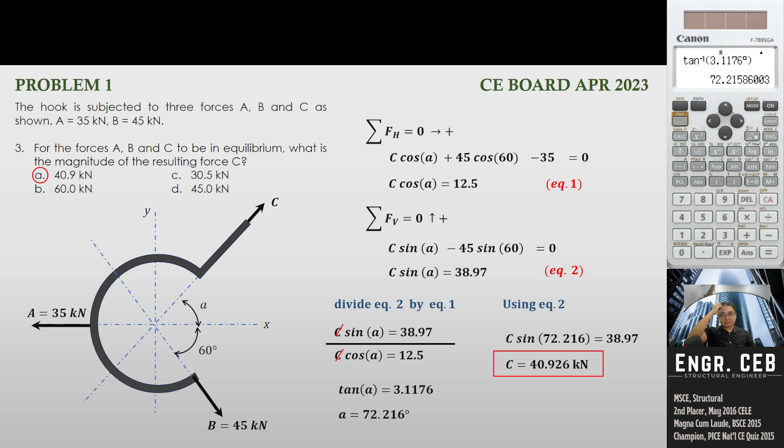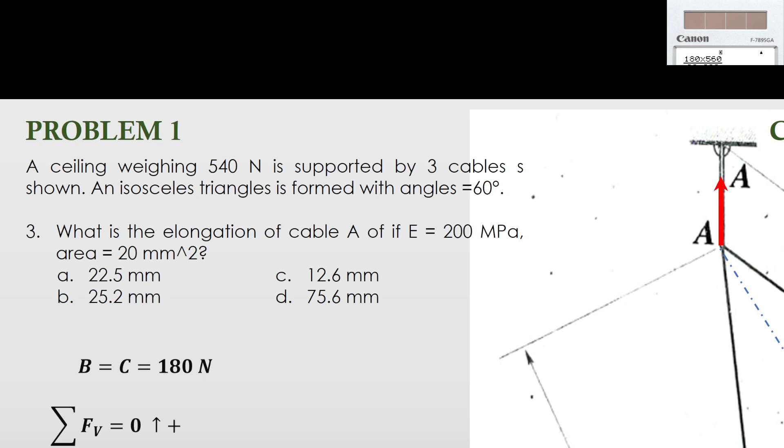And then, ang area, given siya as 20, and the modulus of elasticity is 200 megapascal, no? So substitute mo lang, we can solve that the deformation is 25.2. Tingin tayo sa calculator. 180 times 560 over 20 times 200. Okay, so that is 25.2. So that is letter B.

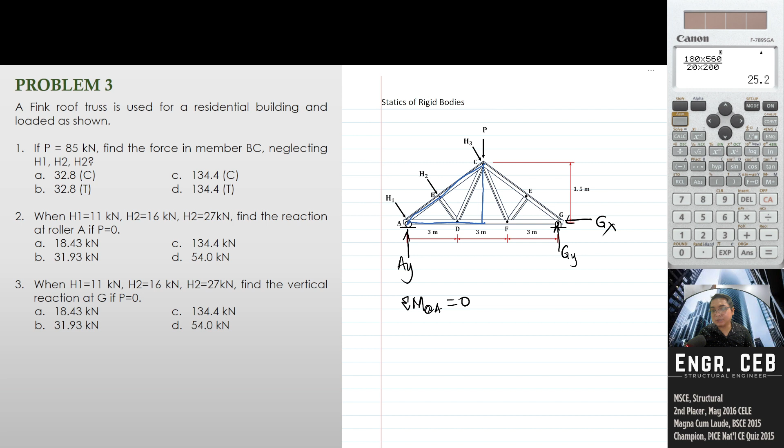Meron siyang height na 1.5. And then, merong width na 3 plus kalahati ng 3. So, 4.5. So, sa right triangle na yan, ito yung dimension niya: 1.5 by 4.5. Okay? So, to get the hypotenuse, kasi right triangle yan, we just get the square root of the sum of the squares ng sides. Let's say, tawagin natin tong side AC. So, by Pythagorean theorem, we have 4.5 squared plus 1.5 squared equals AC squared. So, therefore, mako-compute natin si AC.

And we have square root of 1.5 squared plus 4.5 squared. That is 4.74341649. Okay? Ayan. So, ito yung ating side AC. And then, kunin na rin natin si side AB, no? So, if I will draw a vertical line dito, makikita nyo na pwede natin makompute yung angle, no? Para makompute natin tong segment AB.

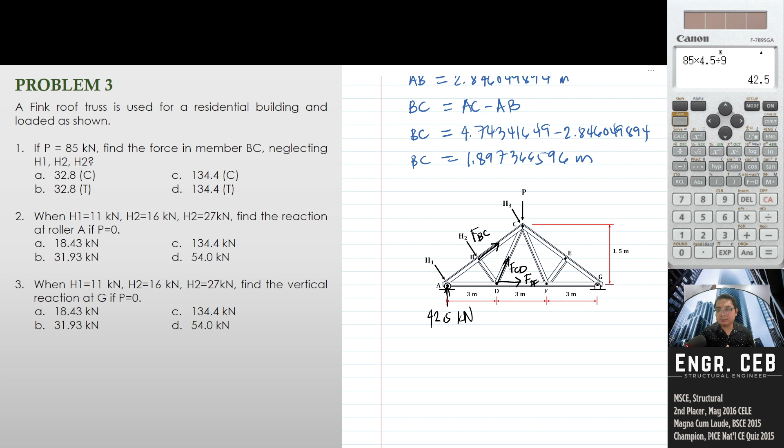So, ang titignan lang natin is itong left side, no? Yung ating free body diagram. So ito, hindi nyo na muna titignan, no? Kasi ang inanalyze natin is yung left side ng free body diagram. Okay? So, with that, pwede na natin i-solve si BC. So, to solve for BC, pwedeng mag-moment lang tayo about point D, no? Sige, so moment tayo about point D.

And then, i-resolve natin into components vertical and horizontal yung BC. So, this is FBC cosine theta, no? And then, this is FBC sine of theta. FBC cosine of theta. Okay? Sige. So, summation of moments about point D equals 0. So, ano yung mga may moment kay point D? So, let's say, positive counterclockwise yung direction natin.

So, ang may moment kay D is si FBC sin theta, no? So we have F sub BC sin theta. Anong moment arm nitong vertical component? Let's say hindi pa natin yan alam. Gawin muna natin B. Times B. Yung moment niya is clockwise, so dapat gawin natin negative.

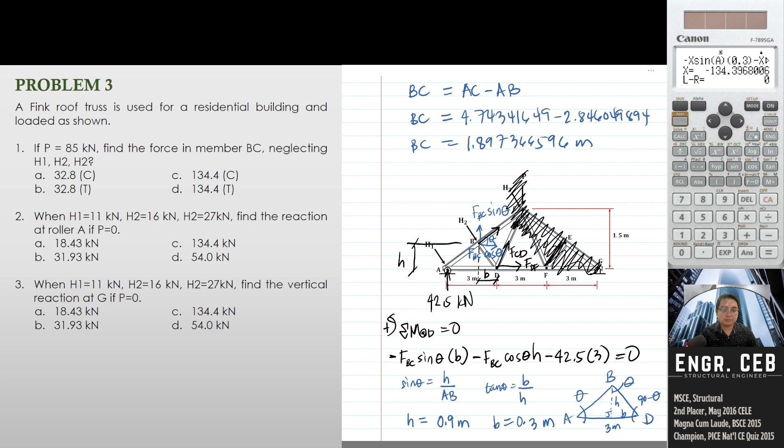So, substitute mo yan, masosolve natin si FBC, and that is F sub BC equals negative 134.3968006 kilonewton, no? Okay, nag-negative siya, ibig sabihin, baliktad yung assumption natin sa tamang sagot, no? Hindi mali yung value, pero baliktad lang ng assumption. So, meaning, instead of tension, lalagay lang natin na compression to. Okay, so yung sagot natin sa number 1 is letter C. So, letter C, 134.4.

Compression. No? Next, when H1 equals 11, H2 equals 16, and H3 is 27, find the reaction at the roller A if P equals 0. Sige. So, this time, may value naman yung mga H pero si P wala. Solve natin.

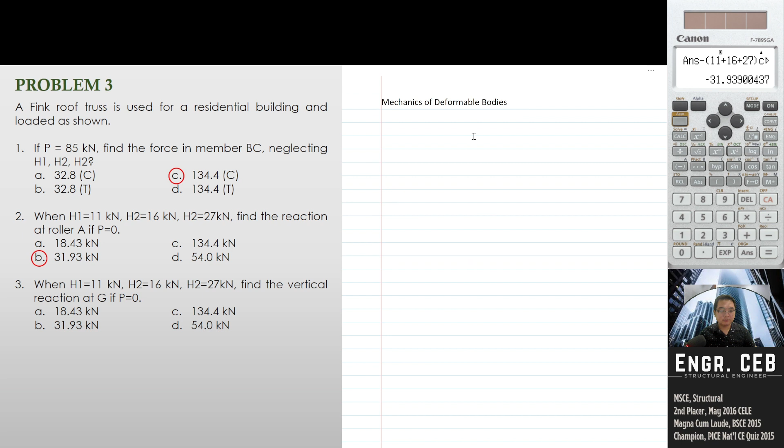Summation of forces along horizontal tayo. Summation of forces along horizontal equals 0. We have 11 plus 16 plus 27 sine of theta minus G sub x equals 0.

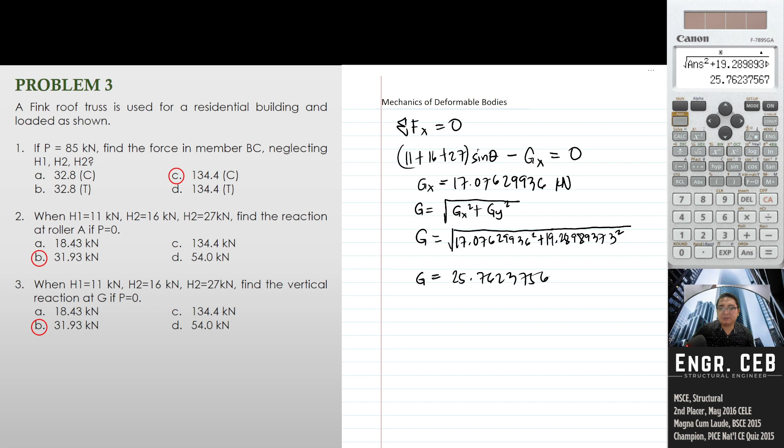19.28989373 squared. So therefore, G equals 25.76237567 kilonewton. So ito yung resultant reaction sa G, no?

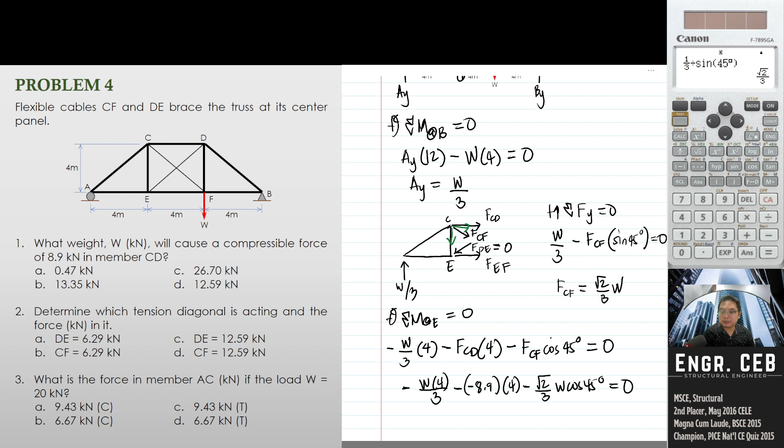So therefore, masasolve na natin si W. So ilan? Yeah, now. So that is 21.36. Ganun.

Ay, sorry. Di ko pa nalagay yung moment arm ni CF cosine 45 degrees. Sorry. CF cosine 45 degrees times 4. So, therefore, that is 13.35. So, 13.35. Okay, so that is letter B.

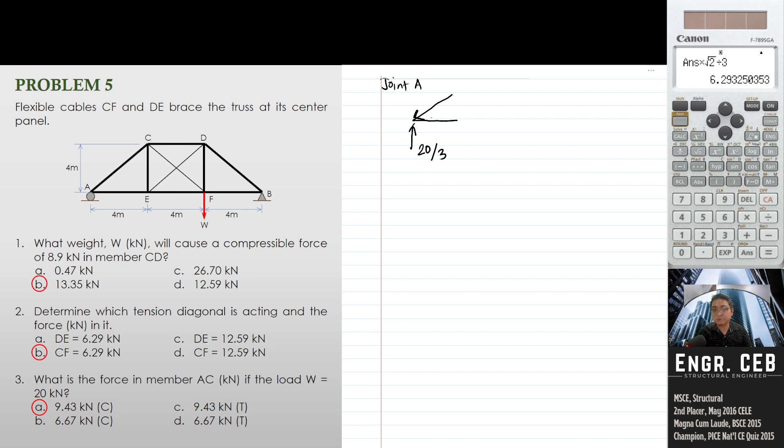Katulad dito, ang upward na force na i-resist ay 20/3 na upward. So, dapat ang maging vertical component ni AC ay downward para ma-maintain yung equilibrium. Kaya kung downward si AC, ibig sabihin, ang nade-develop sa kanya is compression kasi towards the joint ang kanyang reaction. So obviously, si AE naman dapat tension.

Pero si AC lang naman ang hinahanap. So we can sum forces along the vertical and then masosolve natin si AC. 20/3 minus vertical component ni AC, that is AC sine 45 degrees. So the force in AC is 20/3 divided by sine 45 degrees. So that is 9.43 kilonewton, and we have to note na that is in compression. So the answer is letter A for number 3.

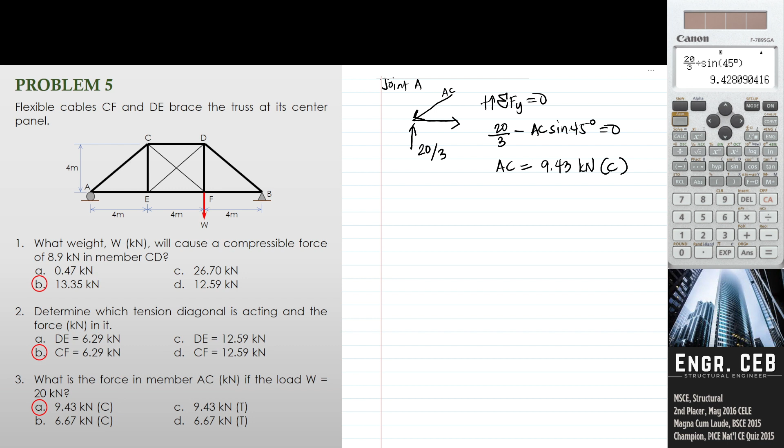So may questions ba? Wait lang ha. Break time lang ng 1 minute lang. Inom lang akong tubig.

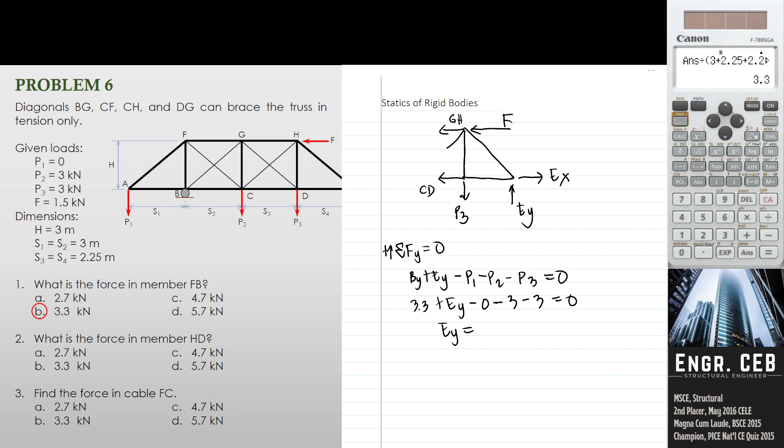P1 is 0, P2 is 3, P3 is 3. So, makukuha natin si EY, that is 6 minus 3.3. So, EY is 2.7. So, P3 is 3 kilonewton, EY is 2.7. Okay? So, tignan nyo class ngayon. Di ba? Merong downward na 3, merong upward na 2.7. So, ano ngayon ang dapat na direction ni CH at ni DG? Yung vertical component nila dapat maging upward kasi mas malakas yung force na downward na i-resist, no?

Tingnan nyo. Ang downward 3, ang upward is 2.7. So, overall, parang meron tayong kailangang i-resist na downward na 0.3 kilonewton, yung 3 minus 2.7. So, para ma-resist yung downward na yan, upward dapat yung maging force kay CH tsaka kay DG. If that is the case, CH will be compression and then DG is tension. So kung compression si CH, sabi ng problem, can brace the truss in tension only. So zero na siya, hindi siya makakapag-carry ng load. So si DG lang ang magbubuhat ng loading.

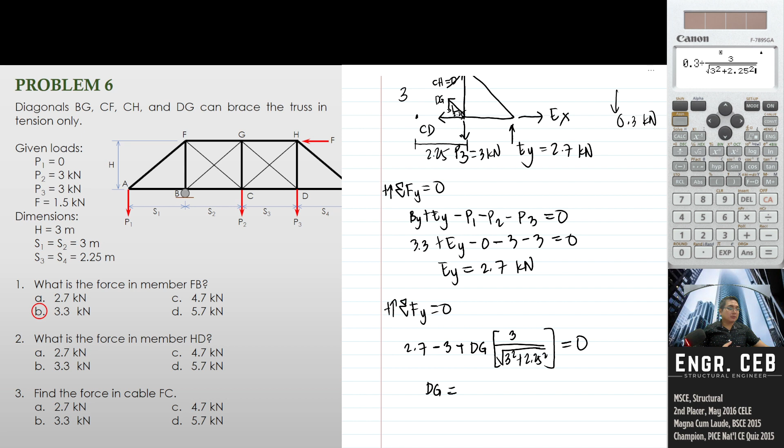So DG equals 0.375. Okay? So kung meron ng DG, pwede na natin i-analyze si joint D. Kapag in-analyze si joint D, ano lang ang force na makikita? Ito, tignan maigi si joint D. So, ang mga forces lang dyan ay

si DG na 0.375, si P3 na 3, tapos yung dalawang horizontal force. Okay? So, imagine, meron kang 3 kN pababa, tapos yung pataas mo, 0.375, pero hindi pa vertical. So, ang kailangan na maging direction ni DH ay pataas. So, pag nag-sum tayo ng forces along the vertical, pwede na natin makompute si DH.

That is DH plus 0.375 times 3 over square root of 3 squared plus 2.25 squared, minus 3 equals 0. So, pwede na makompute si DH, and that is 2.7. Tama? Ayan. So, 2.7 kilonewton. And we know na tension niya, kasi away from the joint yung kanyang direction. So, number 2, that is 2.7.

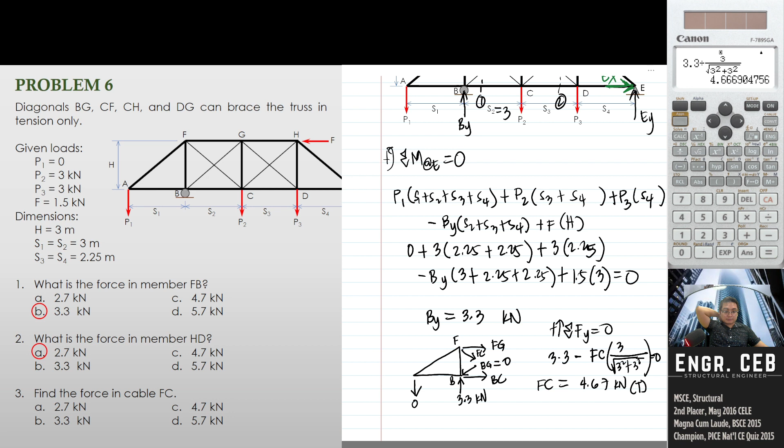So, pag nag-sum tayo ng forces along the vertical, we have 3.3 minus FC times 3 over square root of 3 squared plus 3 squared equals 0. So, mako-compute na natin si FC. That is 4.67. And we know na tension niya. Okay, so that is letter C.